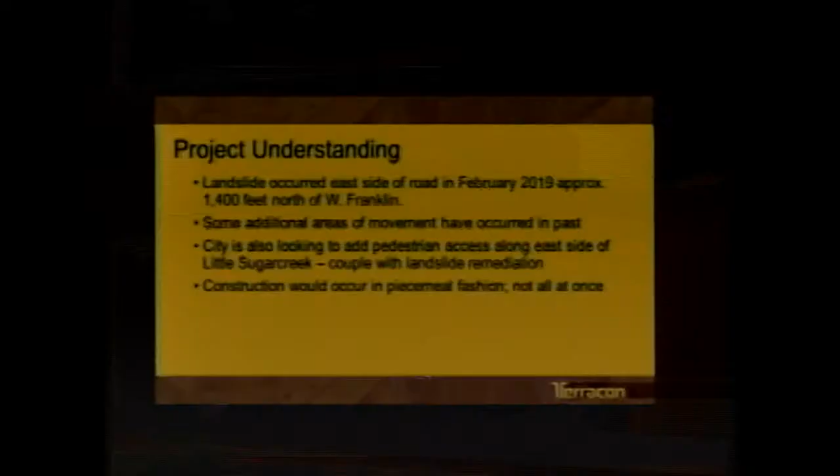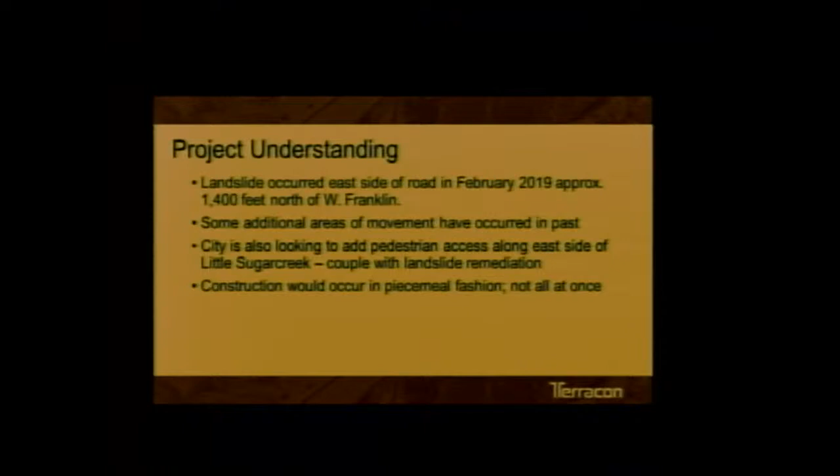So you looked at number one, trying to solidify the road. Then secondly, if we were to add a sidewalk on the east side of it. Correct. It was considering both of those things. You might remember LJB had made a report that looked at a couple of different options. It's posted on our website. That report was, I believe, published in 2020. This is a further study of some of those findings in that report from LJB. Okay.

So did you do something different to consider and then not consider the pedestrian pathway? Or did you just consider the pedestrian pathway? The way the report is laid out, we just considered it. Nothing different for not considering it. There would be a difference, I can get into it later. There could be some differences if the sidewalk wasn't going to be put in place. Okay, thank you.

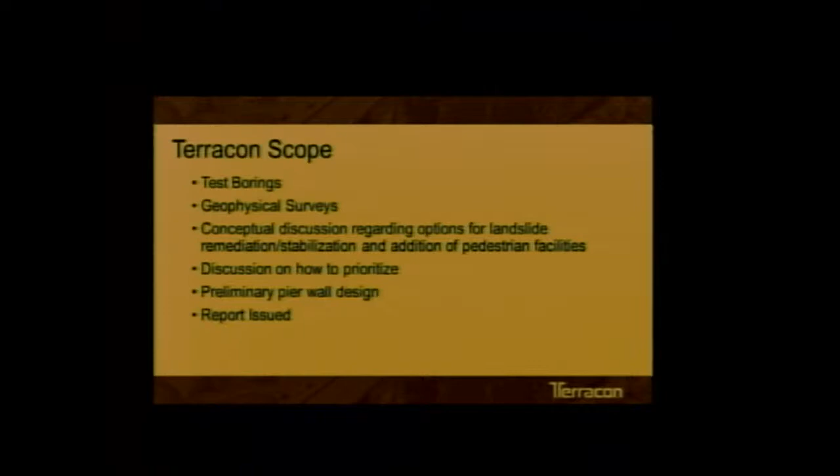Our scope of work was to do test borings, soil borings in the roadway, take soil samples and rock samples. We did a geophysical survey, which I'll get into a little bit more; it'll be easier to understand. Then we were to provide a conceptual discussion regarding the options for remediation and stabilization, also considering the sidewalk. LJB asked us to discuss how to prioritize which areas to approach first. We provided some preliminary pier wall design information, and then we issued the report like Melissa said.

So our field work consisted of 10 test borings in the northbound lane that were performed in the roadway. They were spaced 200 to 350 feet apart, starting from Franklin Street and then going up to the park. So these are our borings here. Between 6 and 7 is the area of that slide from 2019 where geotechnology did some work in 2019, 2020.

So the test borings went 17 to 30 feet deep. They all terminated in bedrock. We did some geophysical surveys, which is where we put some instruments on the ground. We essentially strike the ground. The instruments listen for the sound waves to come back, and then we can kind of map what's going on underground. I'll show an exhibit for that.

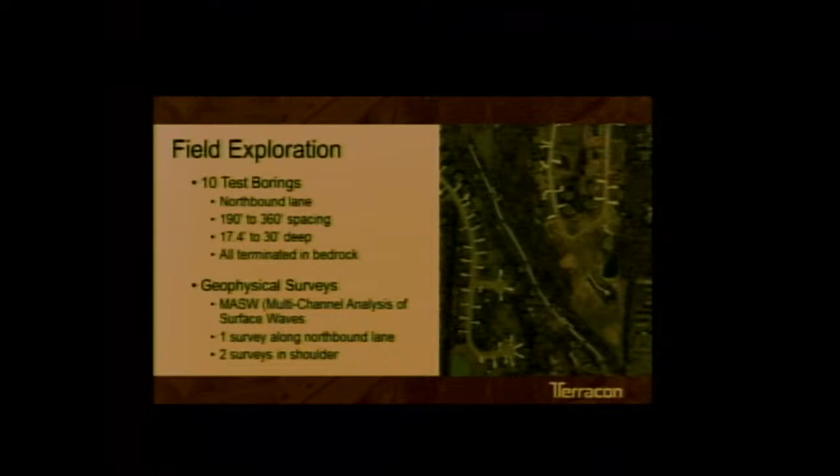But we did one survey essentially in the northbound lane along the whole length, which is about 1,900 feet. And then we did 2 supplemental ones. It's hard to see, but there's some smaller lines, and we did those off the road and the shoulder of the road. The purpose of doing those offset ones was to see if there was any difference in the rock between in the road and then off the road to see if the rock was sloping. Where the bedrock is depth-wise is important for pier wall design.

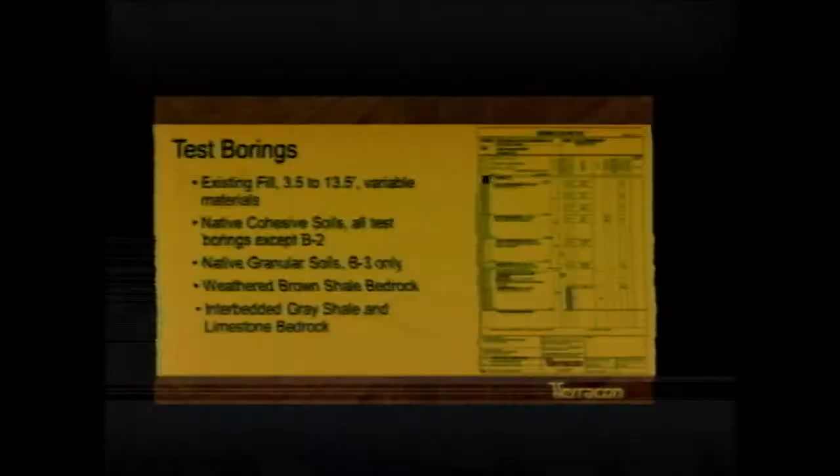So we did 10 of these. This is an example of the boring log. We have one of these for each of the borings. This just essentially tells you what's going on at each test boring location. We got into different materials. First is existing fill, which is material that's been moved by man before. It's been altered by man. It's not native, not natural. So that's associated with original construction of the road.

Then we got into natural soils, cohesive soils, which are clays, and then granular soils, which are sand and gravel. And then we got into bedrock. Bedrock is interbedded shale and limestone, pretty much universal around this area. So there's a weathered brown shale zone, which is rock that is essentially weathered in place, and then it gets into what we call gray shale, which is unweathered bedrock. The brown shale is a little bit weaker than the gray shale, but still bedrock.

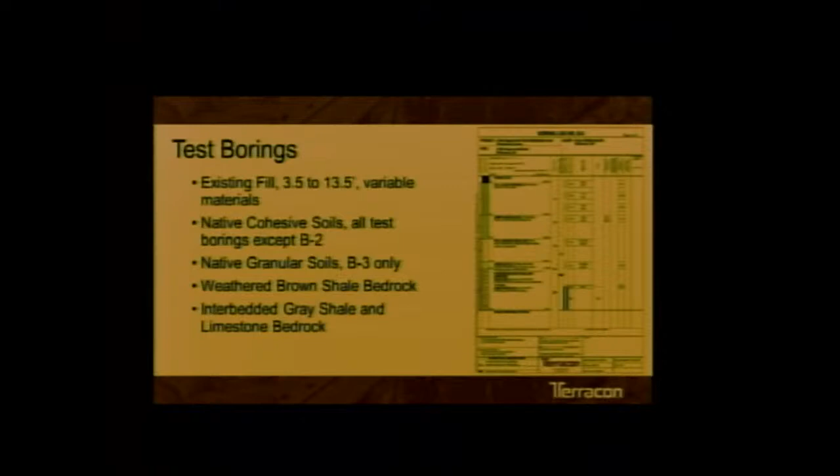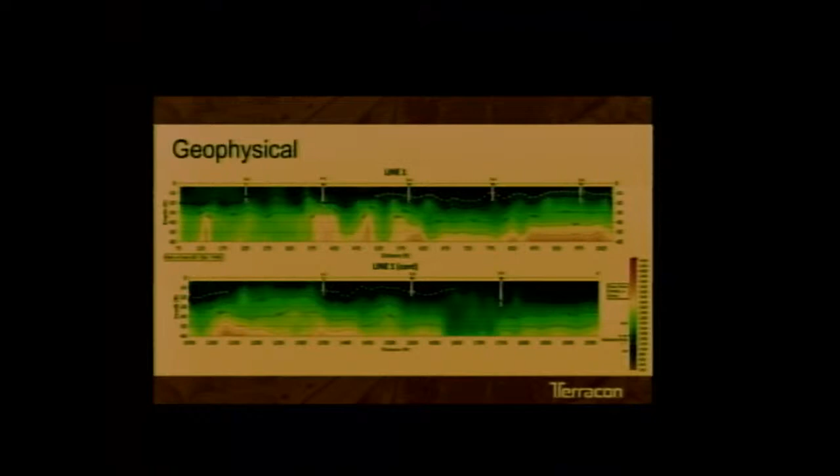So this is just a little discussion on why the slopes move. With roads cut into hillsides like this, it's very common for slips to occur on the downslope side of the road. It could be for a number of reasons. One is weak soils that were put there during road construction. Either they weren't compacted properly or they were just kind of dumped there and they weren't put in place. This is especially true if the roads were built a while ago. Another reason is if you put the soils at too steep of a slope, it's going to want to fail and kind of flatten out essentially over time.

Another possible reason for landslides is as our bedrock in this area weathers over a long period of time, hundreds, thousands of years. As it weathers into soil, that soil can be very weak and you'll get essentially a failure surface where the soil and the bedrock interface.

And then another reason is water. Water is often a contributing factor to landslides, so if you get saturation or if water is not shed properly, it can lead to landslides.

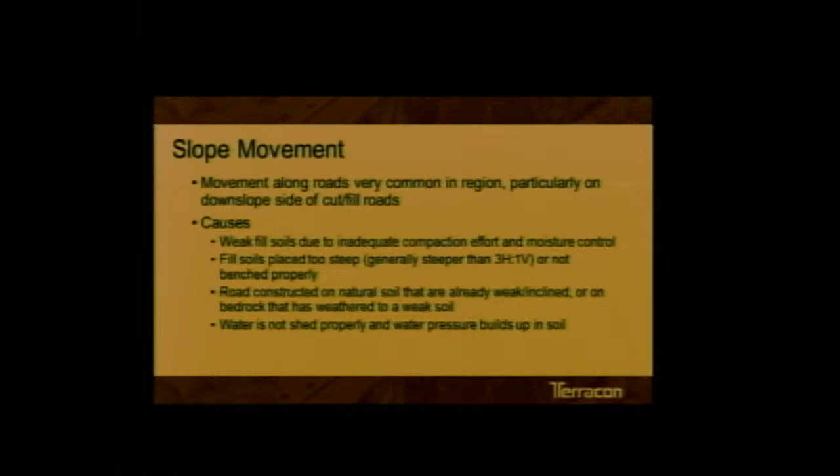So these are just some options, not all particularly applicable to this situation, to remediate landslides, and some of these can be paired with the sidewalk construction. These are just things that are common in the region. The first is just do nothing, essentially. You wait and see what happens. You don't do anything. The slide starts to affect the road, then you approach it then, but otherwise you just leave things how they are.

The second option is a short retaining structure, and what I mean by that is just a short, 3 to 5 foot tall retaining wall. The slope's off on that side of the road, so if you were going to build a sidewalk out, you're going to have to put a little bit of fill out there to accommodate that sidewalk. There's not a lot of room on the downslope side, so you might want to build a retaining wall just to facilitate that sidewalk construction. I'll talk a little bit about that next.

There's an earthwork solution, which essentially you re-engineer the slope so it's not so prone to slope movement and failures. That's a significant undertaking, and with the geometry the way it is, it's not really a feasible option for this, but I just put it in there for consideration.

Soil nail stabilization, I have a picture that I can show you. They essentially come in from the road and shoot or drill these nails into the slope to hold that slope back, and then they grout the face of it. It's definitely a feasible solution if you're just going to address landslides, but if you want to build a sidewalk, it may be a little bit more difficult to implement.

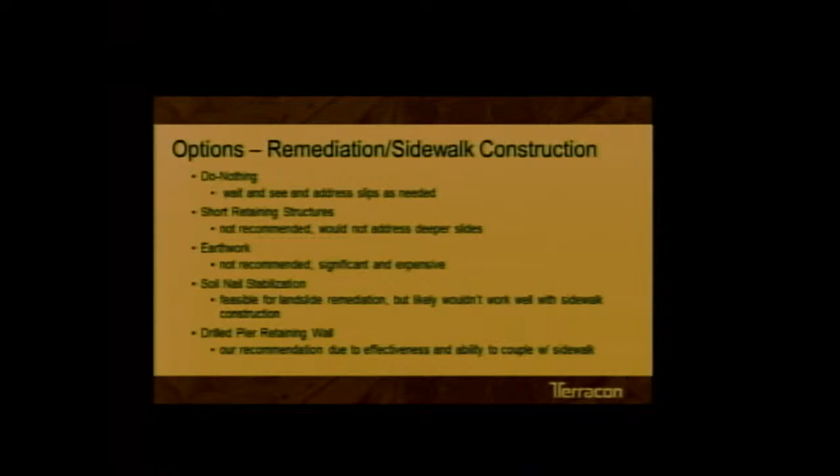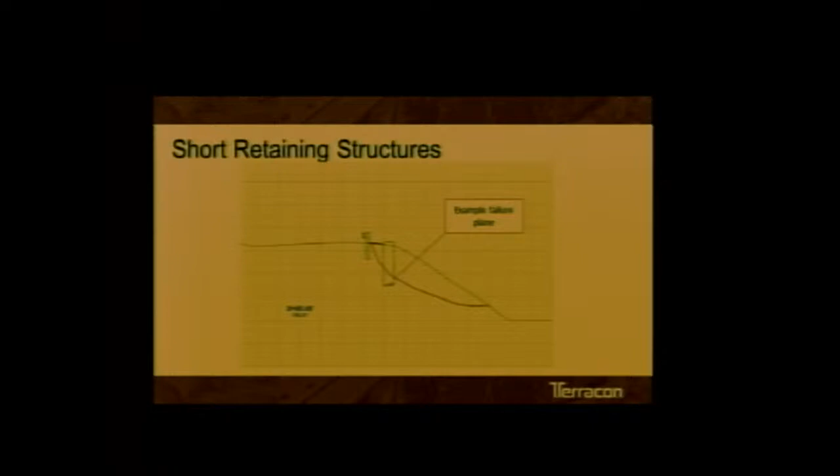An earthwork solution, the goal of this is to A, rework the existing slope that's potentially slide prone, and then B, to flatten the slope. A lot of the slopes now are pretty steep, and that's probably a contributing factor to why there is some movement.

So you would do a combination of reworking this and then potentially flattening that slope. Now that slope goes right down to the creek, and there's not a lot of room for this to happen. You'd also have to clear that whole slope and get a lot of construction equipment in there, and this is pretty much a massive undertaking, and I don't think it's very feasible for what you have here.

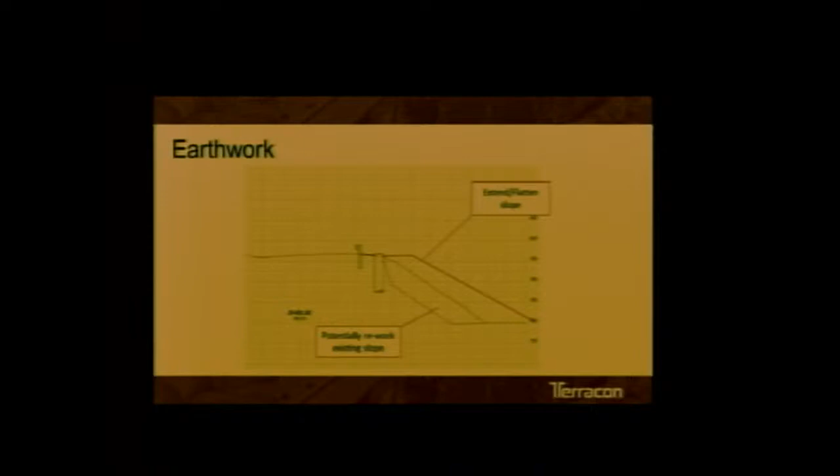Because you have to run a line essentially across the road, and then we need some distance past that too. Okay. So no, we didn't run it perpendicular. So sorry if I misled you before. I'm glad I clarified that.

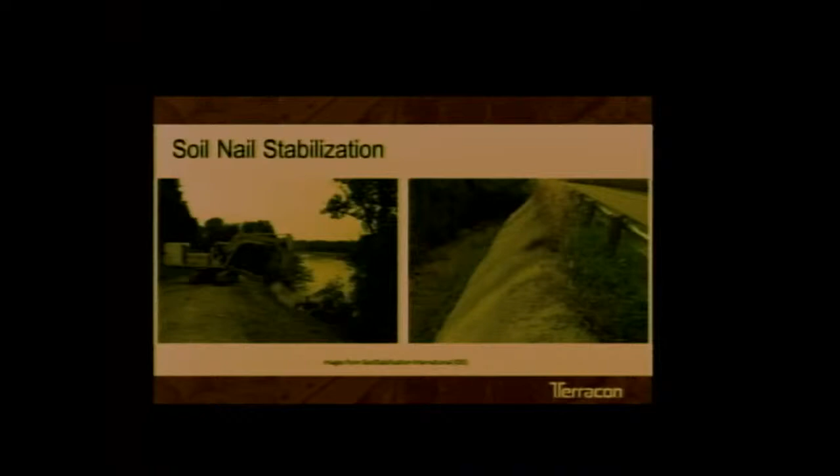Do those nails go down to the bedrock? Not necessarily. There are specialty contractors that install those, and they have their own engineering that they do. They usually run an analysis to see how far in they have to go, but they wouldn't necessarily need to go to bedrock. They're usually 15 to 25 feet long, generally. So that gives the bedrock on most of those borings. Yeah, and they may want to. It just depends on the situation, but it's not a requirement.

Jumping ahead a little bit, has this road moved since the storm in 2019 when it first started dropping off? Did we tell if we've had a shift? So we had a, Ryan, do you remember, it was an inclinometer, or I can't remember the name of that device that was installed?

Strain gauge. Inclinometer. So we did have one of those installed, and it's still there, I believe. And so we left it there so that we could take future readings. The readings are, I think, a couple thousand dollars apiece. So since we haven't had any issues, we haven't read it again. So we don't know if it's moved or not since 2019, but we do have a device that's in place that we can get a reading off of if we need to.

It's just they're really expensive to read from, so we haven't had a need to read it, and so we haven't. I thought there was something in the reports in March that it moved some. Not in this March report? Okay. I think it would be wise of us, if we don't do anything between now and next year, to read the strain gauge in the winter and then read it after the summer. Those two points will tell us if it's moving. If we're not reading it, we're not getting any information off of it at all.

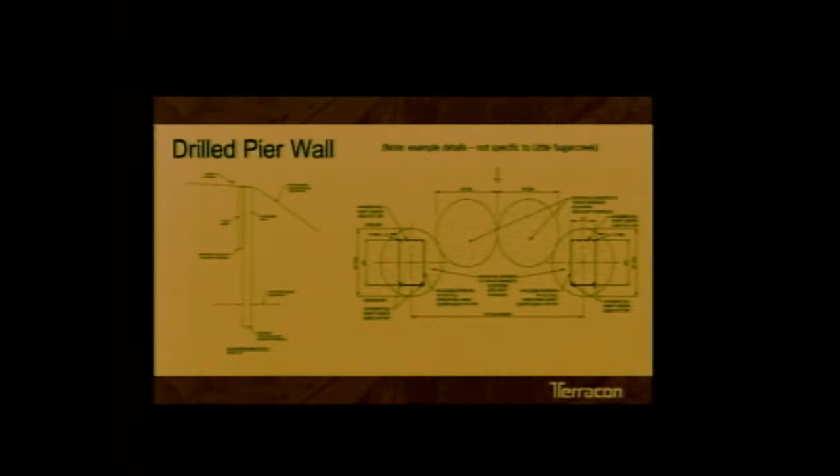Do we have these slides? Yeah. I have the PowerPoint, I can send them. Yeah, I'd like to see these slides, please.

So, roughly, what is the normal spacing between an actual structural pier? 4 to 8 feet, and 6 to 7 is probably the most common. And then is that attached to the bedrock, or is it just drilled roughly close? It's drilled into bedrock, and we'll usually specify 5 or 6 or 8 feet into the bedrock.

So if we had the piers installed, and then all of a sudden on the east side the road started slipping away like that did, we'd have a mess over there. All the dirt would be going down the creek. Right, but hopefully this would hold up the road. I mean, the goal is to hold up the road on the other side and let the downslope side just do what it's gonna do.

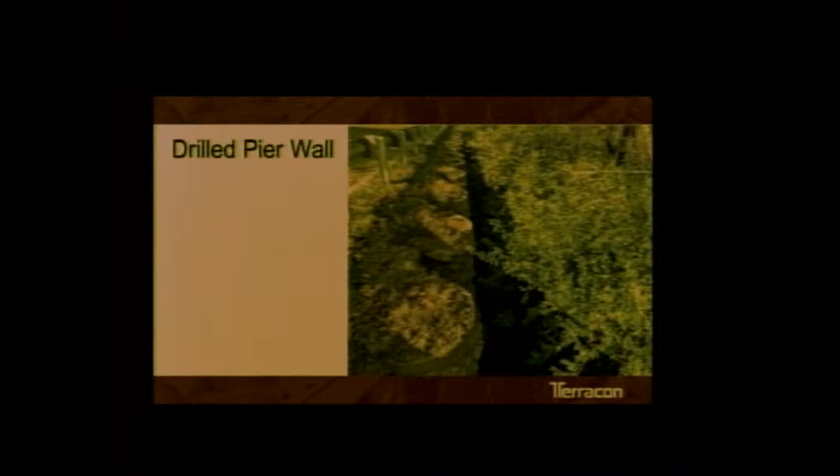Unfortunately, where you did the original study is where bedrock is essentially shallowest, so the estimates that LJB did for that are probably low considering the rest of it, because bedrock is deeper. I don't know if they've run any numbers on this, but the original estimate is probably low.

That's reassuring. Sorry. Yeah. Is what it is.

Unfortunately, there's already landslide issues, and then to add a sidewalk to it, you essentially need more room, and you're kind of putting it on top of an already slide-prone area, so it's a little difficult. LJB asked me if there's any way to prioritize which areas to potentially attack first if you're not going to do it all at once. Number one is address areas that are currently moving or have previously moved. There's the one area we did the borings on, and then there's two other areas where I saw evidence that movement has occurred, one near our boring B8, and one near our boring B2.

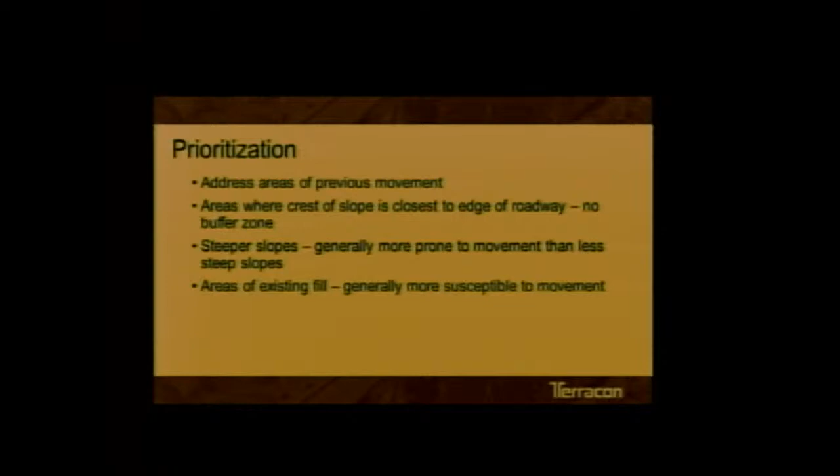The next area to consider is where that slope comes up. Some areas you have a buffer zone before it starts dropping off, but in other areas that slope essentially comes right up to the road. So if that started moving, you don't have any buffer for your road, so that's another area to prioritize. Generally, the steeper the slope, the more prone it is to movement. And then I mentioned that existing fill. That's generally more susceptible to movement, probably because it wasn't placed properly and it's relatively weak. So these are just things to consider if you were to prioritize it. And I think that's all the slides I had.

You identified 3 areas that dropped in February 2019, according to your report. There's 3 areas where you actually saw the road dropped. Where did that soil go? Did the bedrock fail? Did the soil wash away? What happened? It's a little hard to say because I just saw stuff at the surface, so I don't know. The top moved and the bottom moves out, and the bottom probably eroded away or just bulged out. The slides that I saw weren't drastic. They were just slight drops next to the road. It wasn't a massive amount of earth.

If you looked at the guardrail, you could see there was quite a bit of movement. Right at the one area, yeah. That was one of the areas you identified. Right. Yeah, I didn't walk down below, but usually they kind of rotate, and at the bottom, the soil either just bulges out, or if the creek's down there, then it could be eroded away. And I don't know how close the creek is for that, but if it keeps moving and it keeps eroding away, there's less resistance, and it just keeps wanting to progress, so it just keeps happening.